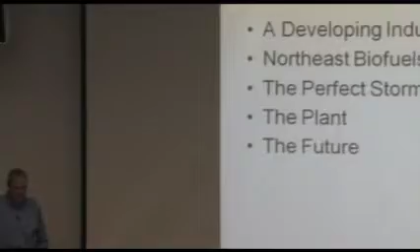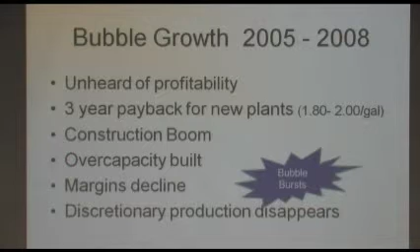During the period of 2005 and 2008, we saw in the corn-based ethanol industry severe growth, with literally dozens of plants being constructed at the same time. This was brought about as a result of overnight, unheard-of potential opportunity for profitability with corn-based ethanol, where previously the margins had always been thin to the point of not making it commercially viable. So overnight, with the price of gasoline, with petroleum becoming more scarce and the market becoming such that the prices were increasing almost on a daily, if not an hourly basis, corn-based ethanol became commercially viable. The payback of new facilities being constructed was very short, and there was a literal rush to construct overnight.

At the time, financial markets were healthy. There was money being thrown at the construction of new facilities, primarily in the Midwest, and primarily the start of these new facilities were agribusinesses, farmers that brought together cooperatives, joined where they had previously focused their attention and energy on growing corn for use in the agricultural business for feed, primarily for large beef operations in the Midwest, South, and Southeast, to overnight becoming energy providers.

Quickly, the industry saw that overcapacity was built. There was a large demand for the raw materials, particularly stainless steel, which is used very much in the construction of ethanol plants. The price of stainless steel, along with at the time the price of oil and the price of gasoline, put the producers and those that were looking to become producers by constructing plants to the point where many never finished the construction of the facilities.

There are literally dozens of plants right now shuttered, either in a partial state of completion or complete and never started. As a result of the declining markets, these facilities have shut down and represent an opportunity for other larger companies to aggregate and see economies of scale as the facilities sit there waiting to be operated. As well, you would expect, like we experienced, the large significant investment — for the Northeast Biofuels facility it was somewhere in the neighborhood of $200 million — goes from a $200 million mortgage to literally cents on the dollar for those that are acquiring the plants, looking at bringing them back into operation.

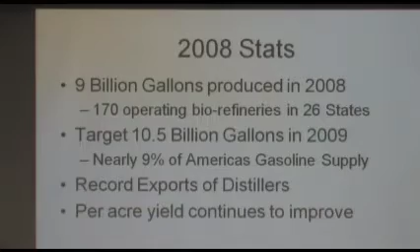Along with this, most people don't realize that the ethanol industry really is truly an agribusiness. Ethanol is a co-product or byproduct of a grain processing facility. We bring in number 2 yellow corn, kernels only, and process the corn in a way where we pull the fermentables so we can create the ethanol, and on the output side have what is really a higher quality than directly off the field material, feedstock for the agricultural business.

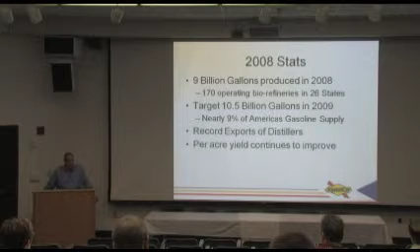Along with the growth of the technology, as you would expect, there's been a lot of work in the agricultural technology business to look at ways to improve the yield of corn per acre, the ways to use more arid soils and regions for the development of corn and the growth of the feedstock necessary for ethanol.

So the growth period that we had had multiple effects, not just on the fuels industry and the energy industry. It's created significant investment in the technology overall and in what is happening.

As Jim said, my background was in nuclear power before coming to the biofuels business. I spent over 20 years, traveled to Japan, Sweden, France, Germany, and was likely in about a third of the United States' commercial nuclear reactors. I quickly found, after becoming involved in the biofuels business, that a biorefinery is more complicated technologically than a nuclear power plant.

You have on the front end a living machine through the fermentation. You have thermodynamics and chemistry through the distillation and the material separation. And more importantly, or more significantly, is the logistics necessary to operate a facility, especially a 100 million gallon facility like the one we have in Fulton.

So what's happened through the growth of the ethanol industry is it has spurred a lot of investment in furthering the myriad of technologies associated with the operation and development of biorefineries, for improvement in efficiency and overall operation and contribution to the energy needed in the country.

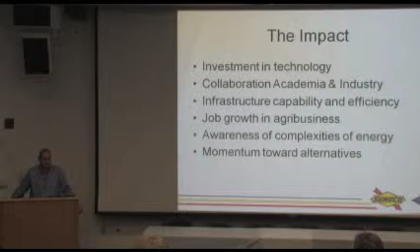With the discussion that's gone on over the last few years, as a result of the tight supply and the high price of energy, and the debate that's gone on with regard to the viability of corn-based ethanol as a contributor to offset the volatility of the market, the public has become much more aware of the complexities of our energy supply chain and what it takes to have a stable supply of energy.

I think ethanol, along with creating the dramatic increase in investment in technology, has gone a long way towards educating the public and sensitizing them to the point that the same old way, same old, is not acceptable going into the future. Options are necessary, and we look to develop them with corn-based ethanol as a starting point.

As we said, Northeast Biofuels started after two gentlemen from the Cazenovia area purchased the Miller Brewery campus. The brewery was constructed in the late 70s and operated for about 15 years. During that period of time, as you recall, Miller Lite was probably the standard on the market.

In the late 80s, Budweiser came on the scene with Bud Light. If you remember the dueling beer bottles during the football halftime, Miller found itself with the Fulton facility, a facility in Albany, Georgia, and a facility in Ohio that was brand new, and found themselves overbuilt with the onset of the competition that Budweiser represented.

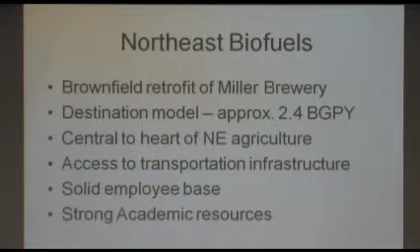So they had to shut one of the three plants down. They chose Fulton. Tom Denny and Eric Will purchased the facility from Miller with the initial intent of scrapping out the brew house, which is constructed primarily of stainless steel. And at the time, the stainless steel market was very high.

They brought in a world-known investment auctioneering firm that specialized in brewing operations. They tagged and inventoried every nut and bolt of the facility and scheduled an auction to take place. Unfortunately, it was scheduled for about a week after 9/11 occurred. So the auction went bust.

They then said, okay, what do we do now? Because the campus is huge, and they had obviously a significant investment just sitting there, growing weeds. They came up with the idea, and were approached by a gentleman from the Albany area about some sort of a biorefinery. Long story short, consultants were brought to bear.

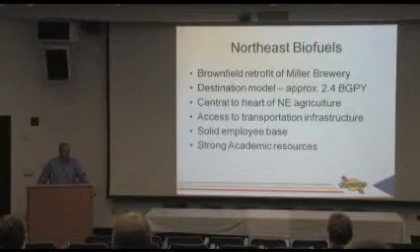They joined with the initial parent company of Northeast Biofuels, a company called Permolex International, that operated biorefineries in northwestern Canada. They came to bear, joined, and signed an engineer-procure-construct agreement with a company out of Memphis, Tennessee, called Lurgi, to retrofit the facility and bring it into operation.

One of the key drivers in being able to put together a pro forma to get the financing for the facility had to do with not only that the infrastructure was there and technologically suitable for a retrofit, but it was determined that the Northeast was especially a good location for a large biorefinery ethanol plant. It was called the destination model.

There's approximately 2.4 billion gallons per year of ethanol consumed in the Northeast, which includes New York, Connecticut, New Jersey, Massachusetts, New Hampshire, and Maine.

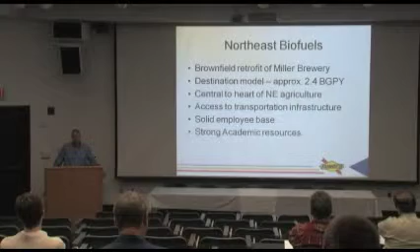Along with the large demand focused in the Northeast, the facility is located within a 250-mile radius of one of the largest concentrations of agriculture, especially dairy, in the Northeast. New York State is the third largest dairy producer in the country, and the Fulton facility is located in the heart of that area. Since the primary product put out from the plant is Distillers Grains, that made the location very suitable for viability.

Along with that, the facility is located on a CSX main spur. We're about 10 miles south of the Port of Oswego, where they're developing increased large-scale barge traffic down the St. Lawrence and overseas to Europe. One of the largest markets for Distillers Grains is Europe, so we saw that as an opportunity given that location. The demographics in Oswego County are such that employment is weak.

We also saw it as very attractive from a geographic standpoint due to other resources available, especially through the academic community, which we would eventually bring to bear in discussing optimization activities once the plant reached steady state operation, and in parallel, how we could leverage academic efforts going on to develop cellulosic and other alternative feedstocks for the facility. So overall, the destination model, both from the standpoint of economics and the market, was a good location.

Our engineer-procure-construct contract was signed in May of 2006, and Lurgi was brought on board initially to come into the facility and perform demolition, stripping the pre-existing mechanical, electrical, and control systems, basically gutting the brew house, leaving in place the tanks used by Miller to brew beer. These would be repiped with new piping, pumps, electronics, and controls to make what we also call beer, which we distill to eventually get the alcohol. The difference being our beer, when complete, is about 13 to 14% alcohol if we're doing a good job, much stronger than Miller Lite would have been.

So construction began in 2006. As I mentioned earlier, the boom period for ethanol was between 2005 and 2008. We found ourselves trying to retrofit the plant right in the heart of that boom period for ethanol facility construction. Stainless steel prices doubled, tripled, and in some cases quadrupled.

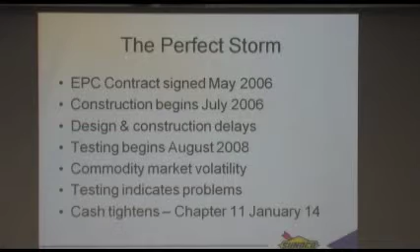The supply of some of the specialty equipment we needed became rare and hard to get, and prices went up again. The engineering firms involved in designing and constructing ethanol facilities were fairly limited—only about 4 to 6 that specialize in ethanol facility design. So the engineering talent necessary was very quickly soaked up across the dozens and dozens of plants being constructed at the time.

The designer we hired found themselves unable to keep up with the design schedule necessary to meet the construction schedule. So we experienced delays in the design and construction of the facility. It was expected to take about 18 months from start to full production. We found ourselves about a year behind schedule, but ultimately began testing of the facility in August of 2008.

If you think back to August 2008, gas prices were approaching $4 a gallon. At the same time, our pro forma expected corn to be somewhere in the neighborhood of $3.50 a bushel. During the period we were finally able to begin testing the plant and consuming corn, we were buying corn anywhere between $6 and $10 a bushel. Natural gas, again, our pro forma was about $2.50 per unit.

At the time we began our testing, it was pushing 13. So natural gas, corn, and petroleum were all through the roof. The bulk of our corn comes from the Midwest, about 70% of it - we expect to develop 30 to 40% local origination from local farmers. But because the bulk of it was coming from the Midwest, the cost of oil for transportation via CSX also went through the roof. So our pro forma was upside down.

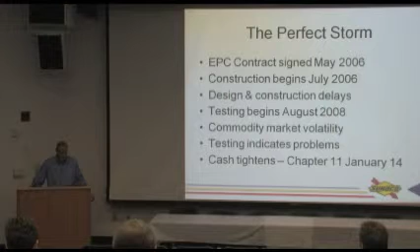Feedstock and energy was orders of magnitude more expensive than what we'd expected when the plan was put together. That issue was then confounded with problems we had testing the facility. We're consuming corn at a very large rate, almost 6,000 bushels an hour, using somewhere in the neighborhood of $250,000 to $300,000 worth of natural gas a month, about two-thirds of that in electricity, and not getting the yield from each bushel of corn because of design issues with the facility. So the stars converged in a bad way, and we found ourselves short on cash from the construction loan, even though the plant was very fully funded, and had to eventually file for Chapter 11 on January 14th. The sale to Sunoco closed on June 15th, just a few months ago.

As I said earlier, there was about a $200 million investment in the facility. Sunoco picked the plant up for $8.5 million - a significant difference in the overhead costs for them to operate the plant.

As we were in the midst of trying to understand what was wrong with our facility, we had engaged ICM, the premier design-build ethanol firm in the United States, to come in and look at what was going on and help us. Fast forward, Sunoco is now on board. Sunoco has fully engaged ICM to undertake an engineering study and develop design modifications necessary for the plant to operate so we can get the yield from the corn we consume. Right now we're in the final stages of finalizing the scope of that design.

The modifications involve primarily reconfiguring what we call the front end of the plant, the biological aspect, to eliminate dead legs and shortcomings in the way the piping was configured that contributed to bacterial infection as we were building the fermentation to create the 14% beer. Bacteria is always present - it would thrive in dead legs in the piping. The piping was also configured in a way where we were not able to clean it.

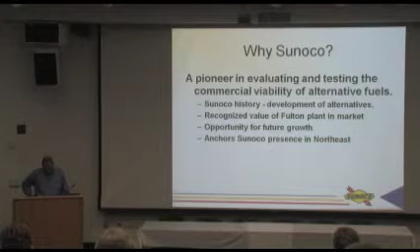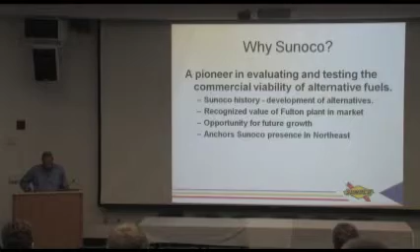Early on, in 1989, they were involved in the distribution of M85. They've been involved in the 90s in the retail distribution and use of propane as a motor fuel, primarily in the Boston and Virginia areas.

They were involved in the use and commercial retail sale of compressed natural gas for motor fuel. They've been selling E10, an ethanol gasoline blend, in the Ohio and Michigan area for more than 12 years. And recently, they've been involved in installing infrastructure, selling and distributing E85 in the Northeast, primarily along the Pennsylvania Turnpike and in areas of Indiana, Michigan, North Carolina, New York, Ohio, and Pennsylvania. So Sunoco has had a long history of exploring alternatives to make commercially viable replacements for conventional RBOB gasoline motor fuel.

They obviously recognize the value of the Fulton plant based on the purchase price, but also based on the geographic location of the Fulton plant in the heart of Sunoco's marketing and distribution network region. In this area of upstate, western, and central New York, on nearly every corner gas station, it's typically a Sunoco station. So they expect to consume and distribute the 100 million gallons per year that we will produce throughout their network of stations here.

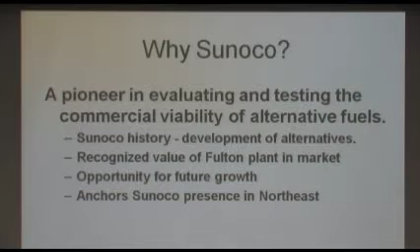And lastly, involvement in biofuels and ethanol is becoming a trend in the industry. Valero, another large petroleum refiner and distributor, purchased half a dozen, six to eight plants, from a company called VeraSun, which at the time, two to three years ago, was the largest ethanol producer in the country.

They found themselves in a situation about a year ago when commodities markets were in extreme volatility. They had a risk management program that had them buy futures of corn in very large volumes at very high prices, and when the market crashed they found themselves extended in the hundreds of millions of dollars, to the point where they went bankrupt, and Valero bought about a third of the plants they owned.

So now you have two to three of the large conventional petroleum refiners and distributors stepping into ethanol production, to eliminate that middle step and hopefully add some additional margin to the bottom line.

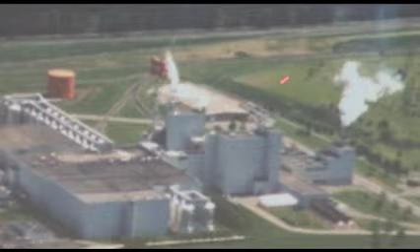Over in the right-hand corner, not yet shown in this picture, is a Linde CO2 plant. We capture the CO2 off of the fermentation process, put it through scrubbers on our side of the facility, where it's piped over on pipe racks to the Linde facility. They put it through additional high-efficiency scrubbers, and in the end they have food-grade and medical-grade CO2, which is loaded onto rail cars or trucks and goes primarily to downstate New York and New Jersey for carbonating beverages and for the medical industry.

So our feedstock, our corn, when not coming in by truck, will come in by CSX from the Midwest in 90-car unit trains. CSX drops the 90-car trains in the ladder track system, where we take the cars and break them into 22-car sets, bringing them around through the rail shed, where we now have a new rail spur located in this area. The corn is then delivered through bottom drop of the rail cars into silos, into a milling building, and then into the brew house, where we begin the mash preparation to start the fermentation process.

One of the things you hear often about ethanol as a minus is the consumption of water that an ethanol plant demands. We are located on a water main that runs along the CSX spur, pulling directly from Lake Ontario. So water demand for us is not an issue.

We're not tapping local wells and lowering the water table, or causing any of those issues. Also, the plant by design is what's called a zero discharge plant. So any water we intake for creating the mash, after the process runs its cycle, is cleaned, reclaimed, and reintroduced to the front end.

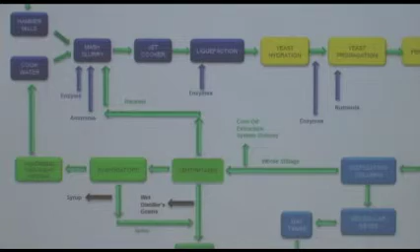Starting on the left, we bring in number 2 yellow dent kernels only, dried to no more than 16.5% moisture. It's brought in by rail and by truck. We have two 500,000 bushel silos that we store the corn in. At full production, the million bushels will last us about 7 days.

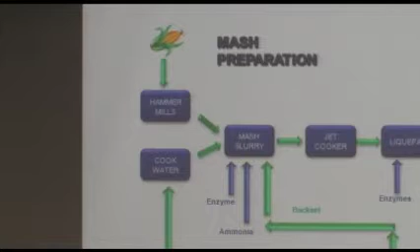It goes into three dry hammer mills. The corn kernels are fed via conveyor into the three hammer mills, where we create a corn flour. It looks just like flour.

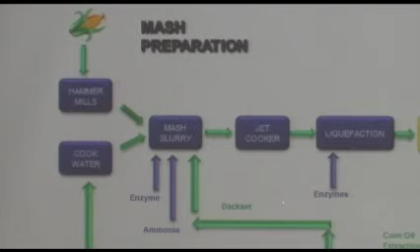From that, it's carried by conveyors into a process where we prepare the flour by putting it through a series of chemical breakdown with the application of enzymes, mechanical breakdown with jet cookers, and then liquefaction, which is time with additional enzymes to break the starches down into more simple sugars for the yeast to consume.

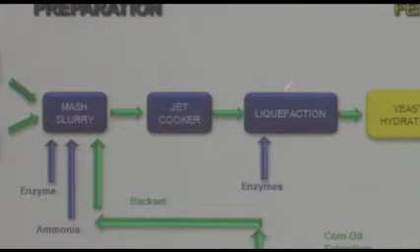We also take the prepared mash and introduce it with yeast. We have a process where we bring in dry yeast, which comes in bales about a foot square. We hydrate it, add nutrients, and then introduce the mash, propagate it, bring the yeast back to life, and verify that it's viable, healthy, and robust.

Then we introduce them to the fermenters, of which we have 24. They work in batches of 4, so it's a continuous batch process. Each fermenter is 277,000 gallons. We are always either filling, fermenting, draining, or cleaning a batch. So as you can imagine, scheduling is very important, especially with the large volumes of material we're dealing with.

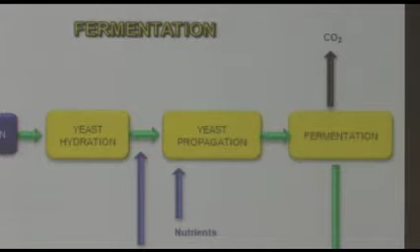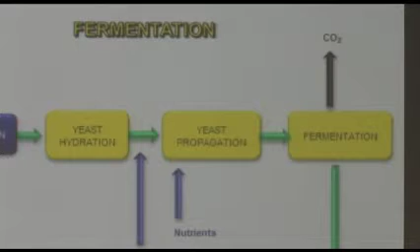We ferment for about 50 hours. If all the parameters are what they need to be—temperature, pH, the right nutrients, no more than a certain amount of organic acids—we'll have a 13.5 to 14% by volume beer, along with the CO2 that we produce, which is captured and sent to the CO2 plant.

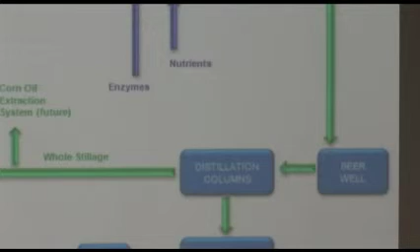The fermented beer then comes to what we call a beer well. It's basically a large head tank that feeds the distillation plant. So we go from the biological aspect in fermentation to the distillation process, where it's largely thermodynamics—we put the 13.5% alcohol through a series of distillation columns and concentrate the alcohol, ultimately getting it to 200 proof.

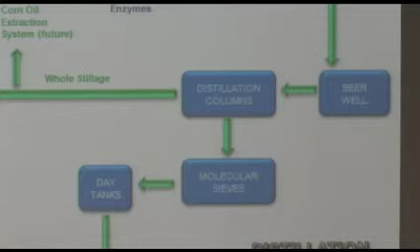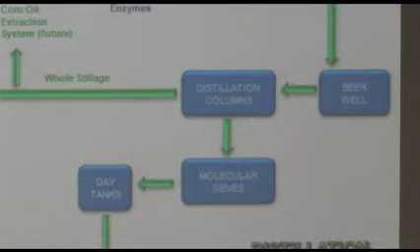So when you hear people say DDE—dehydration, distillation, and evaporation—we distill it, then evaporate the whole stillage. We pull off a syrup from the stillage after the alcohol has been extracted. The syrup is applied to the distillers grains.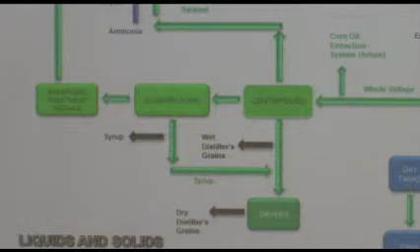And they're routed to large dryers. We have two large Barr-Rosin manufactured ring dryers, where we take the stillage after it's processed through a series of centrifuges. We separate the liquids from the solids, apply syrup off of the evaporators, and dry it.

It's ready for market. The plant was configured, and actually the configuration was changed from the original design.

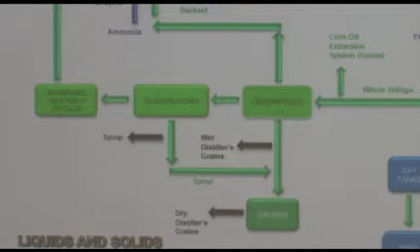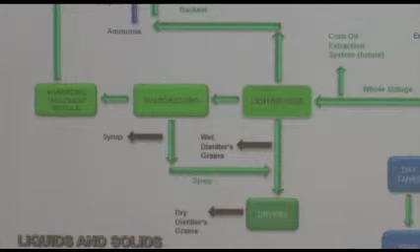In the original design, the facility had thermal oxidizers and heat recovery steam generators. Thermal oxidizers pull the off gas, or the hot air created by the drying process that is high in VOC content, and the thermal oxidizers basically destruct the VOCs from the off gas via high temperature, 12 to 1500 degrees. The original design reclaimed that heat, or a portion of it, to create steam, which was then used on the front end of the process.

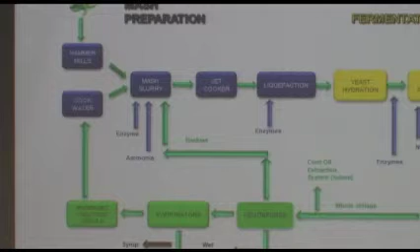We recognized after looking at the demographics in the area, and recognizing that we had about 650,000 head of dairy cattle within a 200-mile radius of the plant, that there was an opportunity for us to not use the dryers exclusively, but to put out either a wet cake product, meaning it comes directly off the centrifuges at about 70% moisture, or a modified version at about 50%.

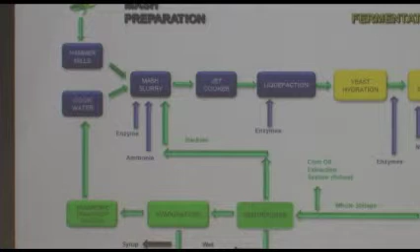Either way, you're not expending natural gas, and you're not emitting VOCs to the thermal oxidizers. It's good all the way around—it gives us more margin and provides a better environmental footprint.

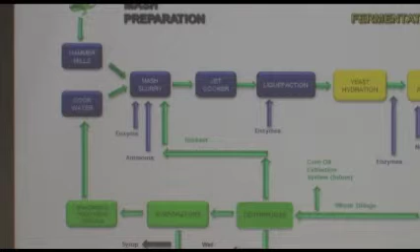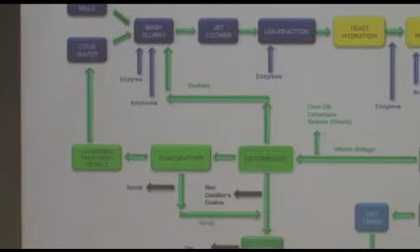The design of the plant, as it was constructed with the thermal oxidizers, was carbon neutral. So we changed the design and went to a regenerative thermal oxidizer design and package boilers. What that does for us is, if we can create the market—and we expect that we can—and put out almost exclusively wet distillers grains to the local farmers, leaving the dryers off, we improve that footprint and our margins even further.

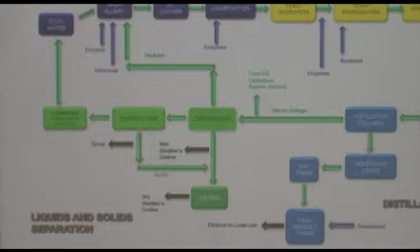So we have the package boilers to generate the steam. We don't need the dryers through the heat recovery steam generators because we've separated the two. We can have a premium product going to the farmers via wet product, reduce our dependence on natural gas, and improve our carbon footprint both ways.

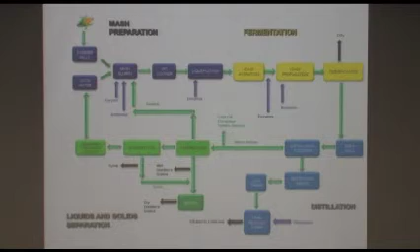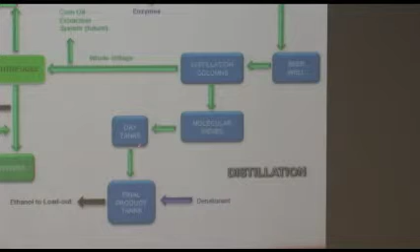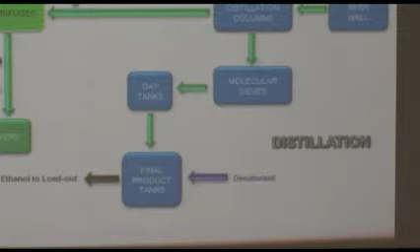That alcohol goes into day tanks where we accumulate 200,000 gallon batches, pull samples, do assays, and make sure they meet all standards and specifications. Assuming everything is good, we then take that material into our final product tanks where we add denaturant, which is gasoline, at 1%—literally to ruin the taste, so we're not putting out alcohol to the locals, and TTB will leave us alone.

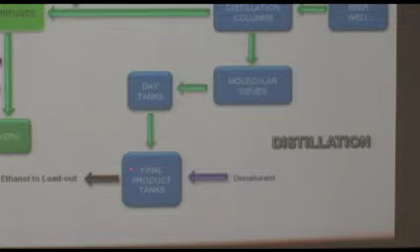So we add the gasoline to ruin the taste, put it in our final product tanks, and it's ready for load-out via either rail cars or trucks.

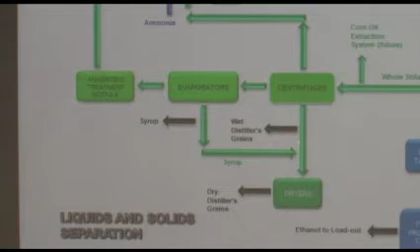After the alcohol has been pulled from the stillage, it goes into centrifuges where we separate the solids from the liquids. The liquids go forward into evaporators where we pull out the solubles in the liquid. Solubles become syrup, which is applied to the wet cake and goes out with it, or goes through the dryers.

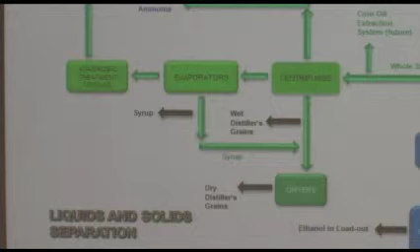The remaining water, after the solubles have been pulled, goes through an anaerobic treatment system. We use that system to remove any remaining organics and acids carried forward. We clean that water, purify it, and make it suitable for reintroduction at the front end of the plant.

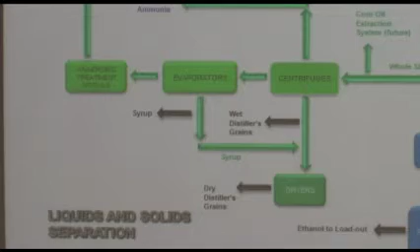Future ideas we're working on—had we not had to go through the issues we went through, we had a contract in place and a schedule for equipment to be delivered in January for a corn oil extraction system. The corn oil extraction system will come off in two stages: one stage on the front, another stage on the back near distillation.

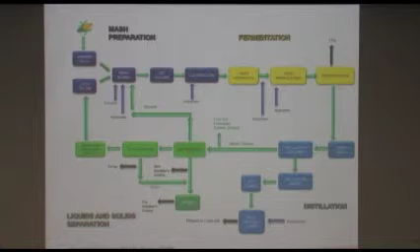We pull a side stream of the mash off of the system, put it through an additional set of cook and centrifuge steps to get oil out of the mash. That corn oil is then used with other chemicals as a feedstock to create biodiesel.

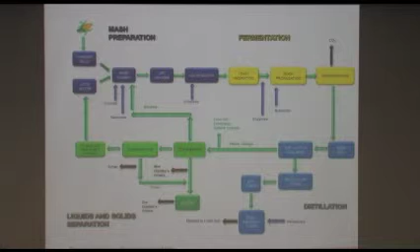The size of our facility and the design of the system we were to install would have yielded about 10 million gallons of biodiesel a year, in addition to the 100 million gallons of ethanol.

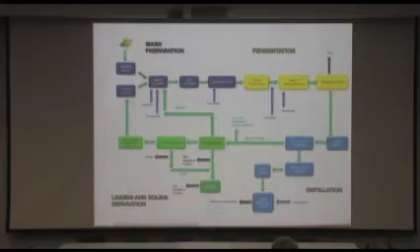As I mentioned, we also have a co-product called CO2. We have the distillers grains, we have the ethanol, and eventually—Sunoco intends on furthering and moving forward with this—we will have the corn oil as well. Any questions on that? Yeah.

Hi, Judy Fitzpatrick. What percentage of your profit, or of the money you make, comes from ethanol, and what percentage comes from the other byproducts?

Ethanol is about 30% of the total. The distillers grains actually is what carries the plant. This is really our core product—the distillers grains. The ethanol and the CO2 are byproducts.

So when you see a lot of people saying that grass is a much better source of ethanol because it's a lot cheaper, they're not considering the other byproducts that come out of the corn.

Is that correct? Absolutely correct.

The naysayers for corn-based ethanol don't typically recognize that our plant is atypical in that we capture the CO2. Most Midwest plants do not capture CO2. That gives us different product streams and a broader stance of margins as markets fluctuate. Naysayers don't recognize that for plants capturing CO2, your carbon footprint is neutral or negative if you move to something other than natural gas to drive your front end and your dryers, which we're also looking at.

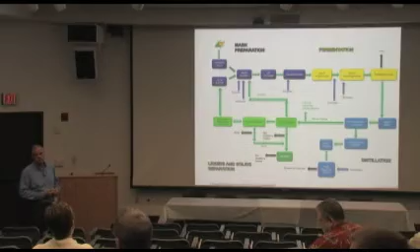So if people went to a grass-based ethanol production, would they actually be able to get byproducts out of that too? I mean, you had said you could convert this plant in the future sometime.

There are co-products available through cellulosic processes. The one I'm most familiar with, and that we've explored the most, is a product called lignin that comes off the woody-based cellulosic process. What we've explored, and still have on the table once the plant is addressed, is to install a biomass gasification process, and/or take the lignin off the front end process and feed a cogeneration boiler to create electricity and steam for the front end of the process.

We've talked to Mascoma, a name people recognize in this region. We've had several meetings with Mascoma about that idea, along with Constellation Energy for the cogeneration aspect of it.

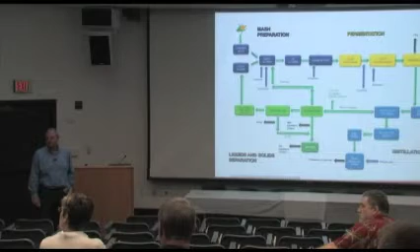Hi, Linda McMaster Schuyler. Is the market for the wet distillers grains mostly in the Northeast? Or do you ship any of this stuff back out to the Midwest?

The difference is between the two products. You have WDGS, wet distillers grains with solubles, and DDGS, dry distillers grains with solubles. The key difference between those two is shelf life. The wet material, especially in summertime, has a shelf life of somewhere between 7 and 10 days, depending on how you prepare it. We've looked at applying propionic acid and other things to control growth and mold on the material. But the wet distillers grains is a local product for that reason.

Where the dry distillers grains, when we were operating, we loaded exclusively into rail cars, and most of that went to New Orleans and was loaded on barges and went to Europe.

Right now, New York State, for those farmers, and many large farms that are 600 head, 1,000 head, are using distillers grains. New York State is predominantly an import state. So the market, because of the magnitude, and I'll show you some numbers in a minute so you get a sense of the volumes we produce, the market here will change overnight. We really don't know how that change will develop.

But when we come online and we're producing product at the quality and consistency needed so farmers will buy it, the market here and the numbers will change. We think it will benefit not only us, but have significant potential opportunity for agriculture, especially dairy and beef, in that order, in New York State. Because the product will be of superior quality, transportation costs could be saved, and additional margin should be available, not only for us, but for the buyers. So we think it could be a win-win for everybody.

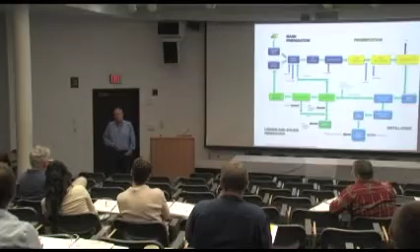So right now the numbers, we think we could get up to 30% locally. That could grow, and we want to get as much locally as we can, because that's margin for us, and it has a positive impact on the agricultural community here in central New York, or upstate New York.

Sonia Wallman, I agree with Judy. I mean, this story should get out more about the actual process economics of all this. Now you changed my mind about corn, actually.

One thing I'd suggest, there's a website, Renewable Fuels Association, rfa.org, that has a lot of good information addressing the debates out there: food versus fuel, water, CO2 footprint, greenhouse gas emissions, et cetera. But you're right, like any other energy industry, whether nuclear or corn-based ethanol, it comes down to education.

Along the same lines as education, our group is training and educating students to understand how to use various cells to grow products, focusing on biopharmaceutical proteins right now, but recognizing we have these crossover industries. So we want to serve you guys.

We've got three core production systems. One uses E. coli, Escherichia coli, which we'll be showing off today, tomorrow, and Thursday. Then we have one that's CHO cell, the mammalian cell of the industry. And we have one we started in 1994 at my school, which a lot of people poo-pooed as we tried to develop it in our group — it's a yeast, Pichia pastoris.

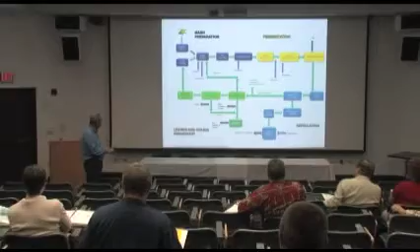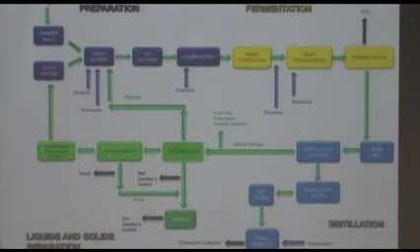She and I met with a gentleman last Friday, and we're now looking at, once we get the plant up and running, possibly eliminating or putting this process in standby mode — pulling a stream off and putting it through an aerobic system that uses a bacteria, a key element in blending certain feedstocks for the dairy industry. That process would let us consume all of the syrup and all of the organic acids that may exist in the process.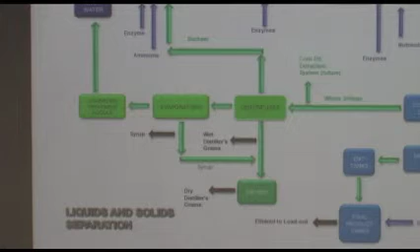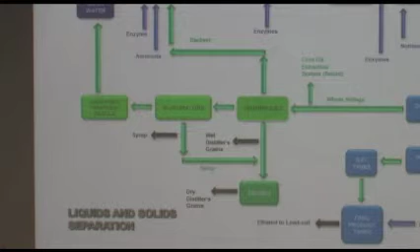It would provide another 70% — it'll increase the value of the grains coming out, he tells us, by about 70%, because of both the defatting and the process we put through to clean and remove the syrup. So there are other opportunities there, using different types of biological processes than what we currently have in play.

There's more going on as well, along with gasification of cellulosic material.

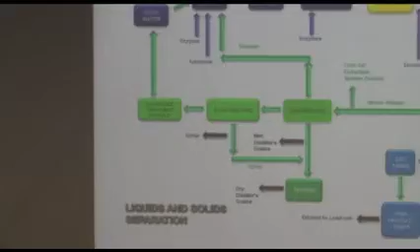Ed Bine here. Related to species, I've read research about using different biological organisms to create branch chain and longer chain hydrocarbons. Are you doing any work in that?

Not yet, but we have had some discussion with some folks at SUNY ESF, so that's in the pipeline somewhere. Again, our number one objective now is to get this baby going, create some revenue, see where the market goes, and then optimize.

Peter Schaefer, Hudson Valley. How many people do you employ in your QA labs, and what level of education do they have?

We are, again, atypical, because we have 24 fermenters, where a typical 100 million gallon plant would have 3 to 5 very large vessels for fermentation. We have 24, 25 if you count the finishing fermenter.

We had 15 people in the lab when we were operating. Erin Brown, who's our process engineering manager, is responsible for the lab. She has a master's degree from Cornell. Her lab manager was 5 or 6 hours away from her doctorate. The other lab technicians, at a minimum, have a 2-year degree, and we have a couple with 4-year degrees.

Primarily biochemistry. One of the things we found when we went out and began recruiting was that it was during the period when Bristol Myers in Syracuse was having a downsizing and reorganization, and we were able to pull resources from them to populate our lab. We also have Budweiser's brewery in Baldwinsville, New York, only 8 or 9 miles away, and we were able to pull some resources from them as well.

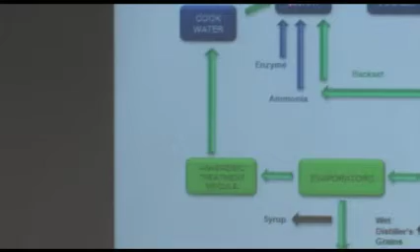That would include verifying density and starch in our mash. We pull and verify yeast count and viability from our yeast propagation. We pull and verify pH, organic acids, and sugars from fermentation, and yeast counts in the early stages of fermentation.

So in the first 6 hours of propagation and the first 12 hours of fermentation, we're pulling samples every hour. We have HPLC and NIR.

We actually started out with one HPLC. When we were in the midst of the challenges we had, trying to really get a handle on the data and numbers to figure out what was going on, we ended up buying 3 more. We have 4 HPLCs in our lab, which is unheard of at any other ethanol plant.

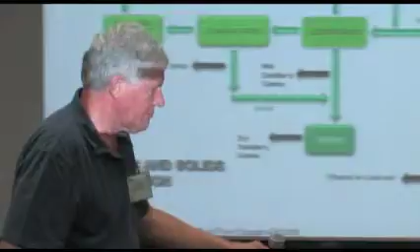Maybe for the sake of time, Brian can finish up the talk. Do that? Yep.

Production numbers. The design basis of the plant said that we would run 353 days a year, and the remaining days would be used for scheduled shutdowns and cleaning, producing 100 million gallons a year.

Again, we fully expect, based on the way the plant is configured, to reach 114 million gallons with the existing equipment we have, without a lot of optimization. The bulk of the stretch from 100 to 114 will be in fermentation. Really, fermentation is where it's at if you're talking about the process.

CO2 production, 807 tons per day. DDGS, 914 tons per day. That is a lot. We could fill this building in less than a week.

Corn feed rate, 101,556 bushels a day. We're feeding about, well, you can do the math, like 4,200 bushels an hour.

We can load ethanol. We have a truck load-out and a rail load-out. Rail load-out, we can load 750 gallons a minute, that's 4 rail cars simultaneously, and we can load about 600 gallons a minute at our truck load-out.

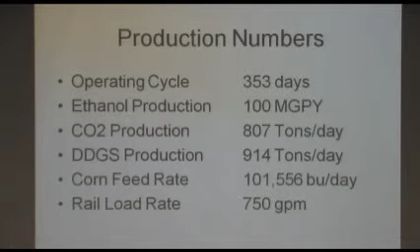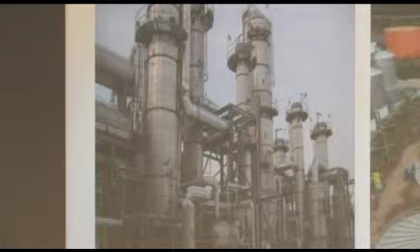This is the distillation plant. Here's the beer column, rectification column. Here is the finished fermenter, beer well, day tanks, and these are our finished product tanks. These are 1 million gallons each.

So we take the ethanol, once we've pulled the sample and tested it and confirmed it's good, it's then piped out to these 2 tanks. On its way, we introduce the 1% gasoline.

Once the alcohol's been pulled, it comes over to this building where we have 6 Flottweg centrifuges, horizontal centrifuges. We separate the solids from the liquids. Liquids get sent back through anaerobic treatment to the front of the plant, and the solids get sent over here.

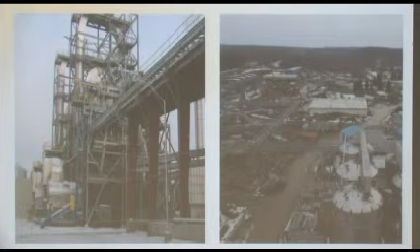If we're going to dry them, they go through these dryers. Basically you have hot boxes here and a large plenum, which is an air duct where we introduce 850-degree air with very large blowers. We feed the grain into the blowers, and by the time it makes the trip up and around the duct, it goes from about 70% to 10% moisture.

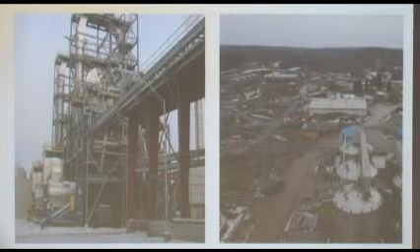Goes on a conveyor, and then into this building. This part is where our wet cake is stored. It's got overhead cover but no sides on it. Farther to the right, which you can't see in this picture, is an enclosed building where we store the dry distillers grains.

This is the end of the fermenter string and the pipe rack. Over here is the gas plant, where we send the CO2 via a large blower. It goes into this building where they have compressors and scrubbers that pull any remaining contaminants out of the CO2, compress it, liquefy it, and store it in these tanks. It can then be sent to this area where we have a loadout rack. On one side we load ethanol, on the other side we load CO2 into rail cars.

So our plan: complete the design development. We hope to mobilize our contractors sometime mid-fall, complete the modifications, and then move into a flush and hydro test.

The plant, we do a very extensive pre-start safety review and process hazard analysis for the portions of the system that we call in scope. In scope is basically anything higher than a 10% alcohol concentration. We do a very thorough and adequate process hazard analysis.

Then we get into a first grind, do our performance testing, and reach steady state operation. We're already starting to outline plans, so that as soon as steady state operation is reached, we then move into optimization.

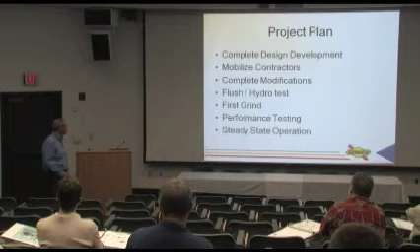So, keys to success, not just for us but the industry, right? We've got to maximize the value of the existing products. And we're looking, in the future when we get into optimization, at ways not only to create the products we currently create in a more effective and efficient way, but also to further apply technology to improve the environmental footprint, and look at improvements in production efficiency.

Look at alternatives to fossil fuel for production. We rely right now on natural gas for running the boilers, to make the steam, to prepare the mash, and for heating the dryers to dry the wet cake into dry distillers grains with solubles. We're looking at ways to offset that reliance on natural gas through biomass, biogas, gasification, and other technologies.

As we look at optimization and planning, we're being very deliberate about greenhouse gas and the footprint that we have. As I said, the design basis of the plant right now is that it's carbon neutral.

As we go forward, we want to continue to improve upon that, looking at integration of cellulosic and other feedstocks in the plant. Because we have 24 fermenters, as opposed to a typical 100 million gallon plant with 4 or 5, we think, through discussions with those developing the technology, that we're uniquely suited for integrating commercial scale cellulosic while continuing with corn-based, doing it in a measured step-by-step way as opposed to full in.

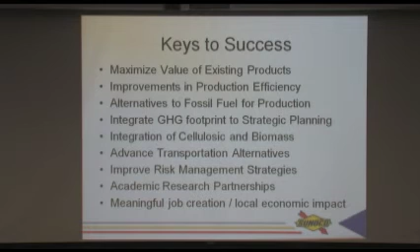Meaningful job creation. I don't know how many of you are from around this region or how many have been through Oswego County lately, but it's in a sad state of affairs. You go through Fulton, right? At one time you had Miller, you had Nestle, literally dozens of companies that made the Fulton/Oswego area pretty active and viable. It's a sad thing when you drive through town now and company after company is gone, buildings sitting idle, windows boarded up, kids standing on the corner looking for work.

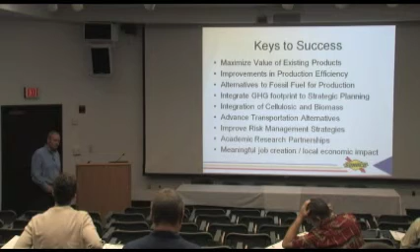So we think this is part of us, not just directly at the plant. When the pro forma was done for the facility, we had 67 people at peak when we were attempting to operate before. I think when we come back, it'll be in the same neighborhood. But they estimated spin-off jobs and total impact from this plant somewhere around 2,000 jobs. 2,000. And that's what's going to happen.

To survive, it's got to stand on its own merits, in the absence of subsidies, tariffs, and the other layers that always come to bear, because that's what feeds the argument. The margins have got to be clean margins. People have got to understand, right? Unlike what happened to commodities before, where it was people with paper driving the market.

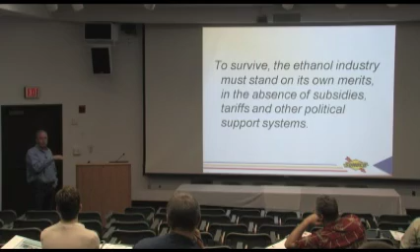It wasn't the consumer that caused the price of food to go up. It wasn't the consumer buying ethanol causing the price of corn to rise, which caused a loaf of bread to go up. It had nothing to do with it. It had to do with the guys who understand derivatives and hedges, sitting in an office with a laptop buying hundreds of thousands, millions of gallons, bushels, whatever it was, and making the price go up. There was a time last year where speculators owned more corn on paper than any of the ethanol plants did, in aggregate. That's what caused the price to go up, along with gasoline and natural gas. It wasn't the consumer and the typical model you'd see of supply and demand.

I'm done. Thank you.